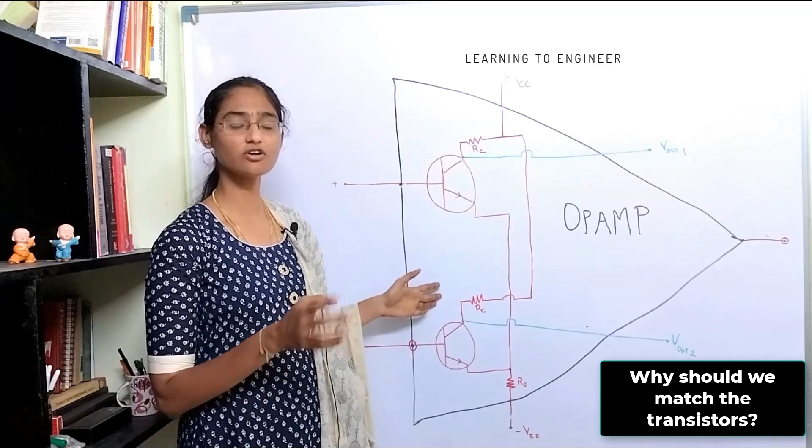So, a few questions that we will be discussing today: why is an operational amplifier generally based in common emitter mode? Why can't it be in common collector or common base mode? That's the first question. Next is, we have to match both these transistors in order to be used in a differential amplifier configuration, right? So, why should it be matched? What will happen if this is not matched? Third thing is about common mode rejection ratio. Let's get started.

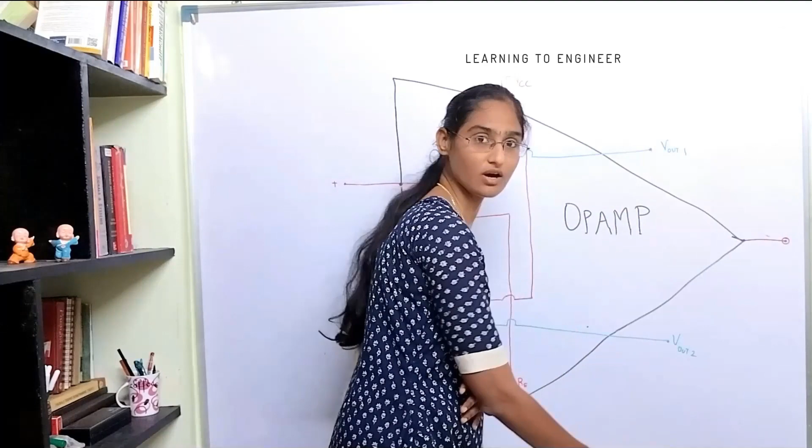An operational amplifier is a device which operates in differential mode of operation. We can take a BJT for it or a MOSFET or any device which is capable of acting as a difference amplifier. Both these transistors have to be matched because only when we match them, the base currents would be the same and the gain is also the same. That's the primary reason why we are matching this amplifier. Say, for example, this is not matched, the voltage supplied as Vout1 will be different from that of Vout2. Ideally, Vout1 should be the negative of Vout2 and that is the primary objective of an operational amplifier.

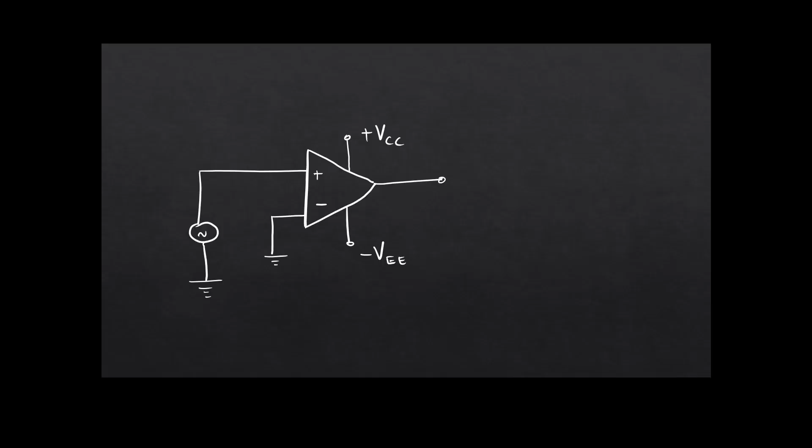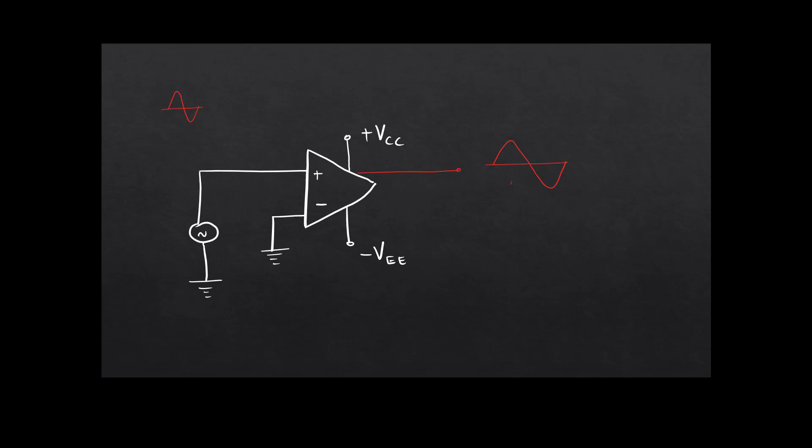What does an operational amplifier do? It can be used in different ways actually. One of them being when we are supplying a non-inverting input and an inverting input into this operational amplifier, the common signal will be suppressed and the difference of it will be amplified. That is the reason why we use an operational amplifier. This can be used in single input and single output mode, differential input and single output mode, single input and double output mode, and differential input with double output modes too. You can also take both the values of output. One will be positive and the other one will be negative. So this is the advantage of using an operational amplifier.

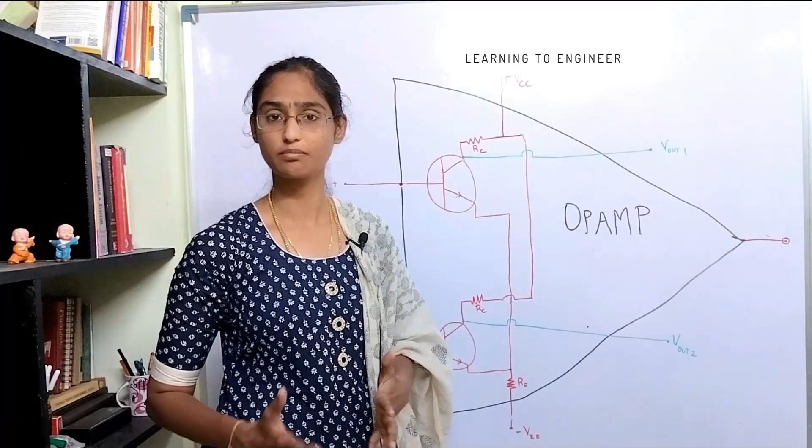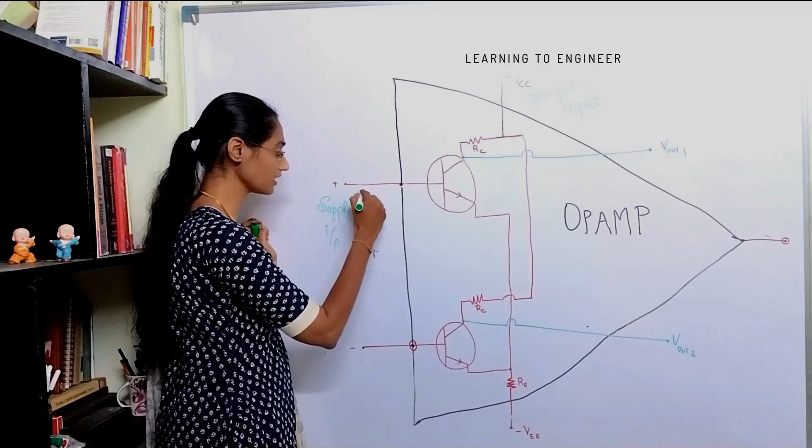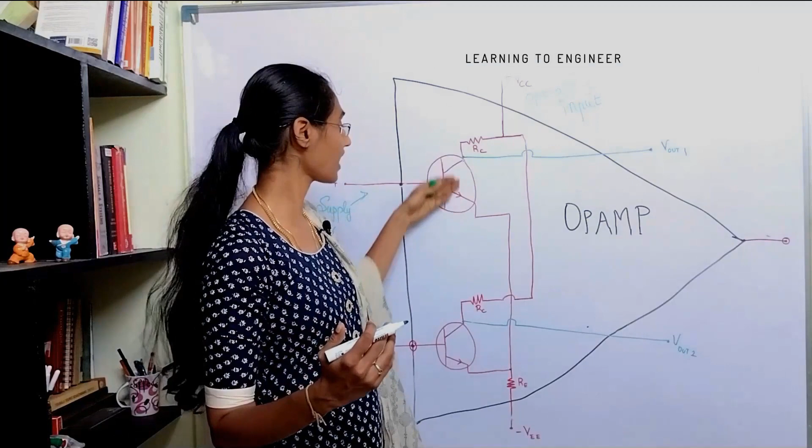To use this amplifier, we need two inputs. One is this set, which is the base supply that we are sending into the non-inverting terminal and the inverting terminal, and next is the plus VCC. Both are supply voltages, but what is the difference between them? This is called the operating input and this is called the supply input. If we are going to calculate the difference of these two voltages, you will be supplying it in the plus and minus terminal. In order for the operation to happen by this BJT or this MOSFET, we will be using this plus VCC and minus VEE terminal, and they will be there to have a basic voltage for smooth functioning of these two devices.

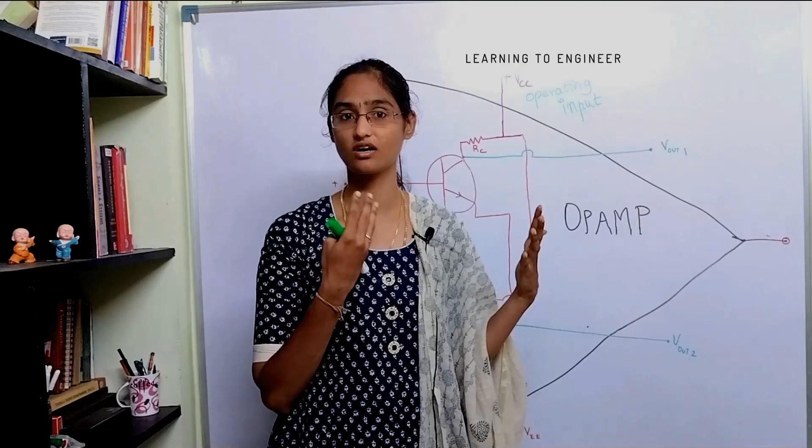Consider the case of a mobile phone. There will be a battery inside the mobile phone which will act as an operating input to our mobile phone. Say we are talking to our friend over it. The voice signal will be the supply input because the objective of the phone is to transfer the message from one phone to the other phone. This will be the actual input supplied to the system as a whole. But for the system to operate, we have a battery, right? That input is the plus VCC and the minus VEE terminal.

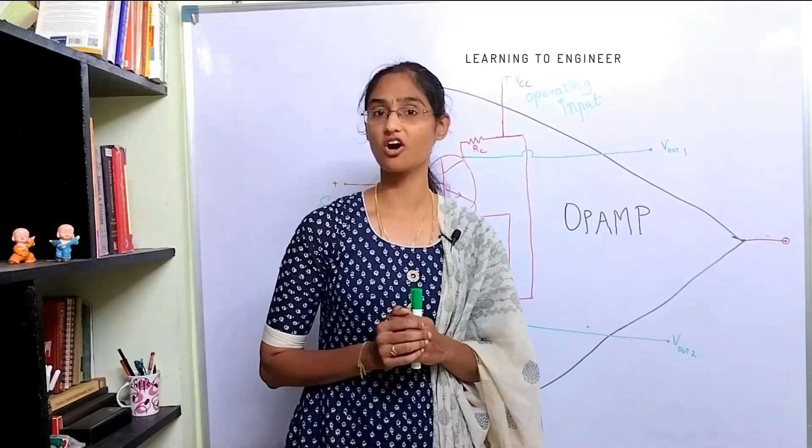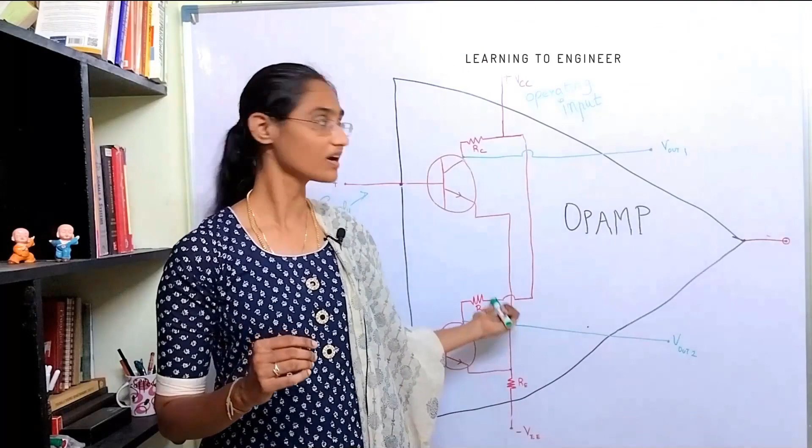Our next question is, why should we use these transistors in common emitter mode? Why can't we use them in any other modes? This is because only in common emitter mode, the VO and the VI, or the supply and the output voltage, will be 180° out of phase with each other, which is one of the motives of having an operational amplifier. This is not possible in any other modes. So we use it in common emitter mode.

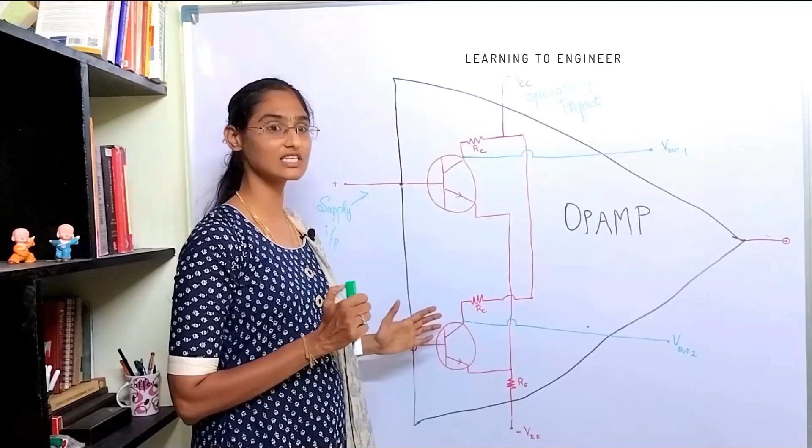We just saw some basic idea about operational amplifiers in this video. In the next video, we'll see the detailed working of this amplifier. What is the equivalent circuit? This is the equivalent circuit where we use both these transistors in the positive and the negative terminal. We will see how matching of transistors helps us in achieving our motive.